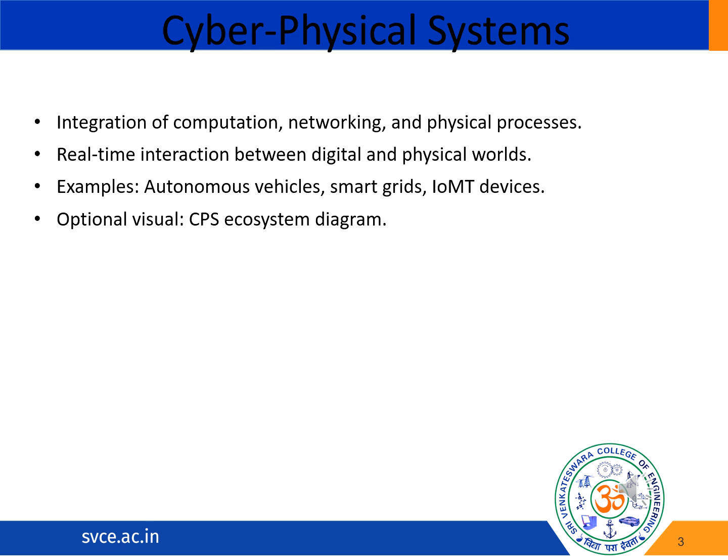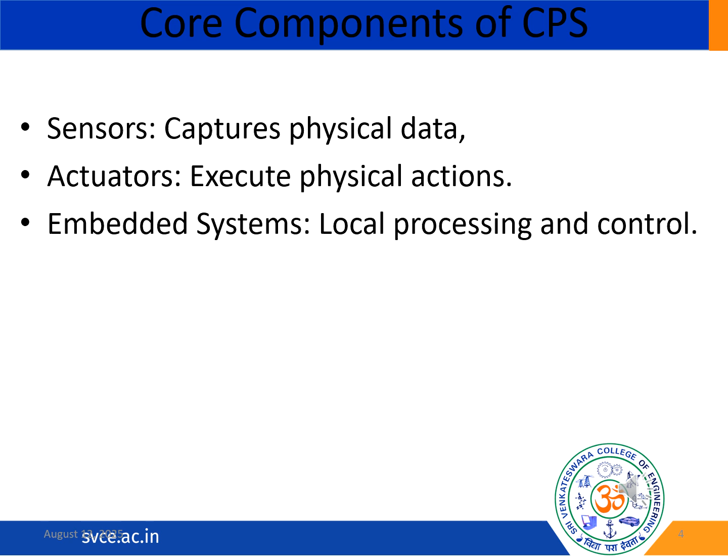Moving on, we have the core components of CPS systems, which we have already seen. The key components are sensors, actuators, and embedded systems. We have local processing and control, and control can be considered in embedded systems. So here we are going to see what is meant by a control system. A control system is a system in which the behavior of the system is determined by a differential equation. Basically, it controls the subsystem or the system of systems, and it manages the devices and systems using control loops.

In control systems, we have various engineering and automation processes, and control systems are now considered an integral part of IIoT. They are responsible for the regulation and behavior of dynamic systems, so we can achieve desired outcomes. A controller has some essential components of control systems, and it plays a critical role in maintaining stability and efficiency. So a control system is nothing but one that controls the subsystem of systems.

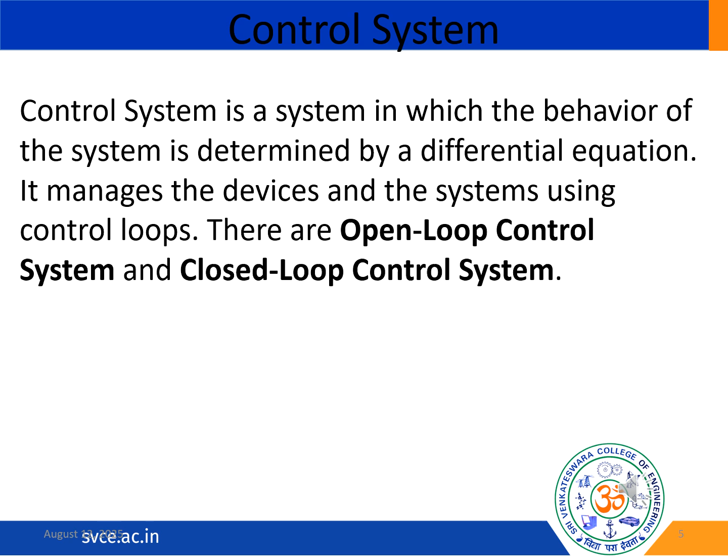Next we are going to see what is meant by an open loop control system. Here we don't have any feedback, and error handling techniques are also not followed. It is very simple compared to the closed loop system, and it is economical, but optimization is not possible in an open loop control system. Overall, maintenance is very easy in open loop control systems.

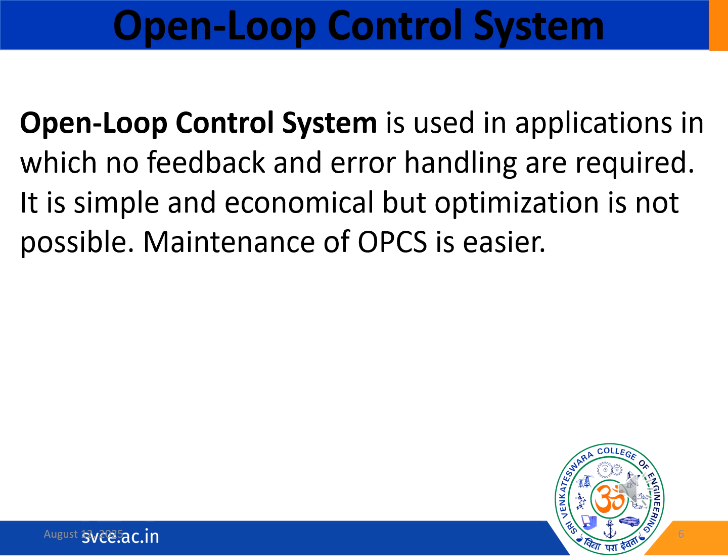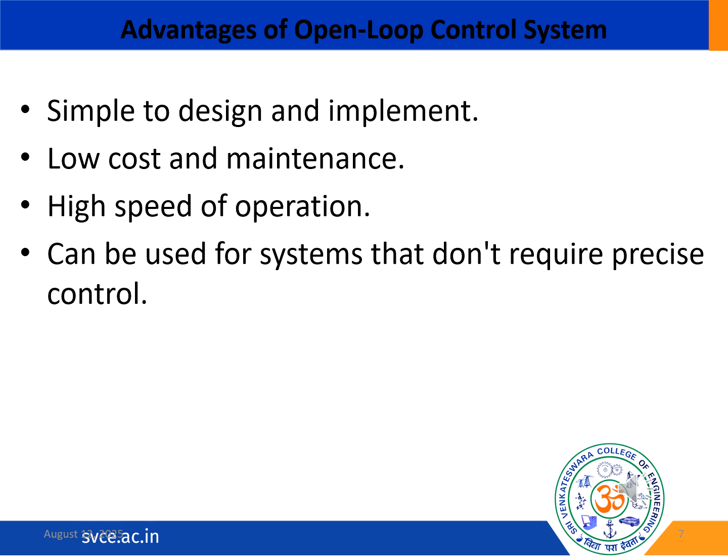Moving on to some advantages of open loop systems. It is very simple to design and implement. There is no need for feedback or any other loop process. It is low cost, and maintenance is very easy. High speed of operation can be achieved, and it can be used for systems that don't require precise control. These are the advantages.

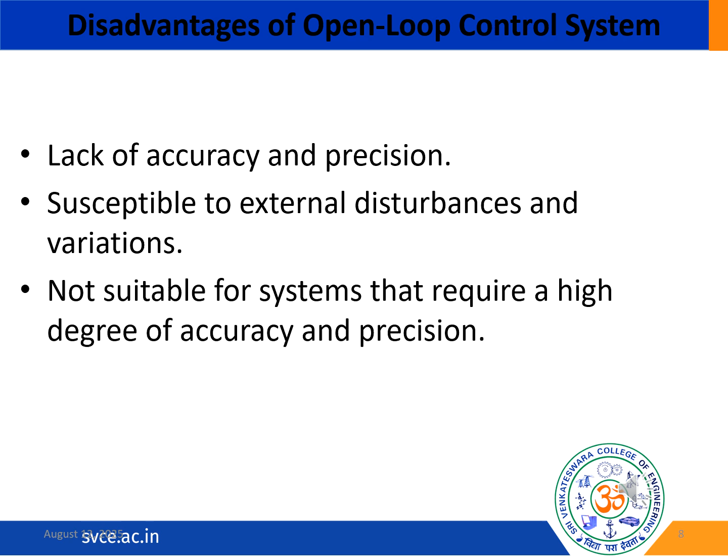Next, the disadvantages of open loop control systems. There is a lack of accuracy and precision. There are external disturbances and other variations, and this system is not suitable for a high degree of accuracy and precision. We have already discussed all these points.

Basically, we have many types of requirements. Any type of input can be provided, so it can work under mechanical engineering, electrical engineering, or any other system based on the requirements.

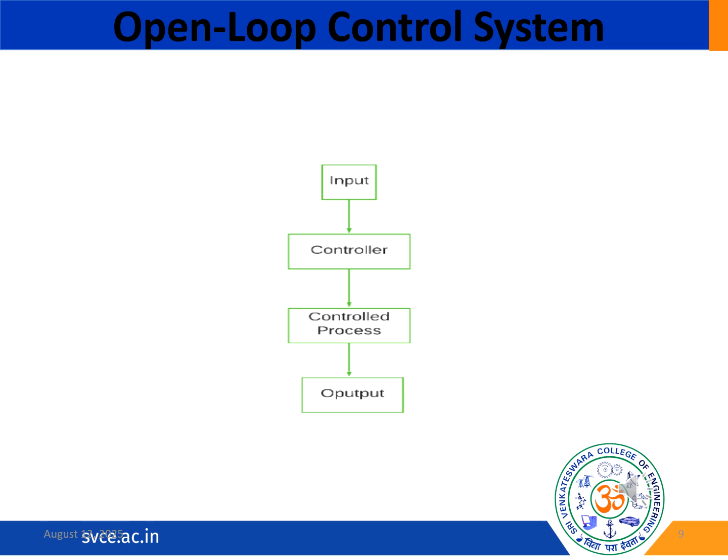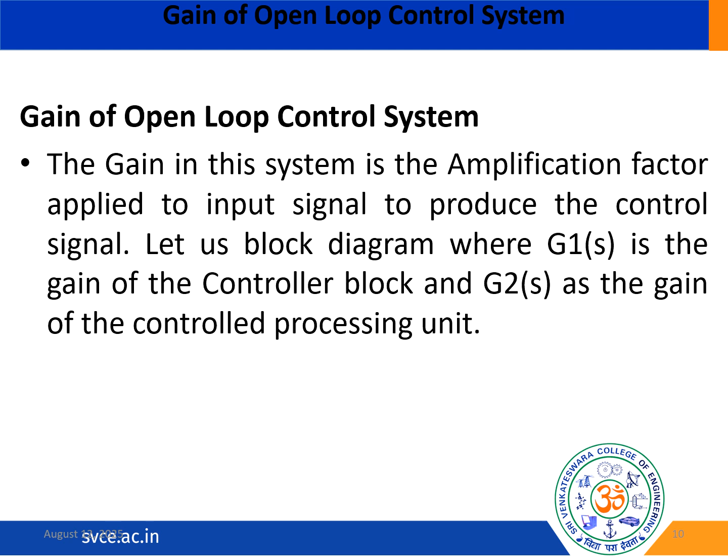We have the controlled processing unit. So let's understand with this block diagram for gain. So first it is the input. We have represented input as Xi of S, and next we have the controller G1 of S, and next we have the controlled process, which is represented as G2 of S, and next we get the output, so we call it X0 of S.

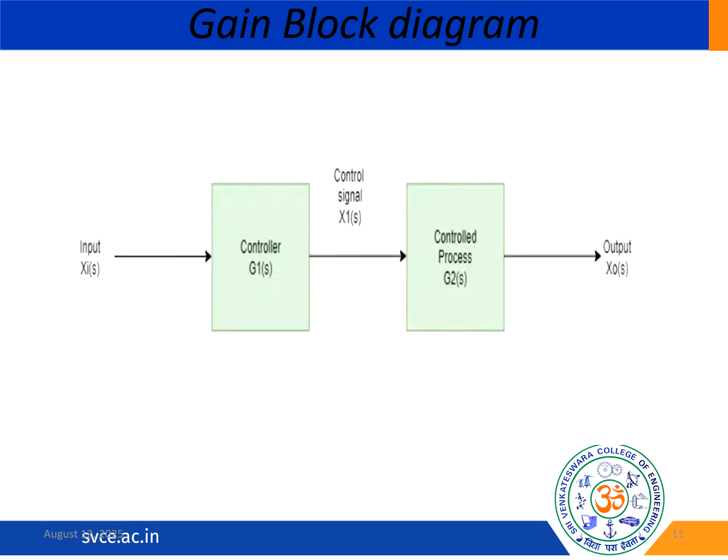So in between the controller and the controlled process, we have the control signal, which is represented as X1 of S. So let's continue with the relationship of the gain of the system. We can consider the magnitude of the input and the output signal. So when you consider this type of system,

gain of the system is represented as G of S, which is equal to output signal divided by input signal. So in the previous diagram, you know what is represented for the output signal. The output signal is represented as X naught of S, and the input signal is represented as Xi of S.

So gain of the system is represented as G of S, which is equal to output signal divided by input signal. So G of S is equal to, straight away we can write the term for output signal, X naught of S divided by input signal, that is Xi of S, where G of S is the gain of the system.

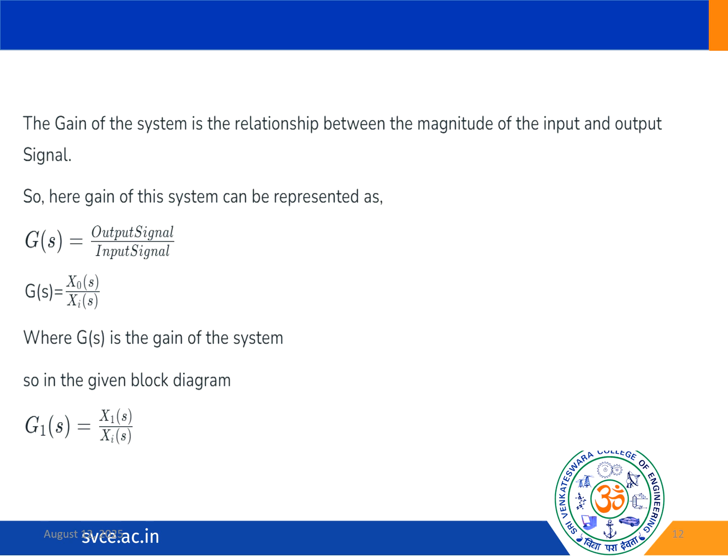So in the given block diagram, we can specify G1 of S as G1 of S is equal to X1 of S divided by Xi of S. Similarly, we can write G2. It can be written as output divided by the input, so X naught of S divided by X1 of S.

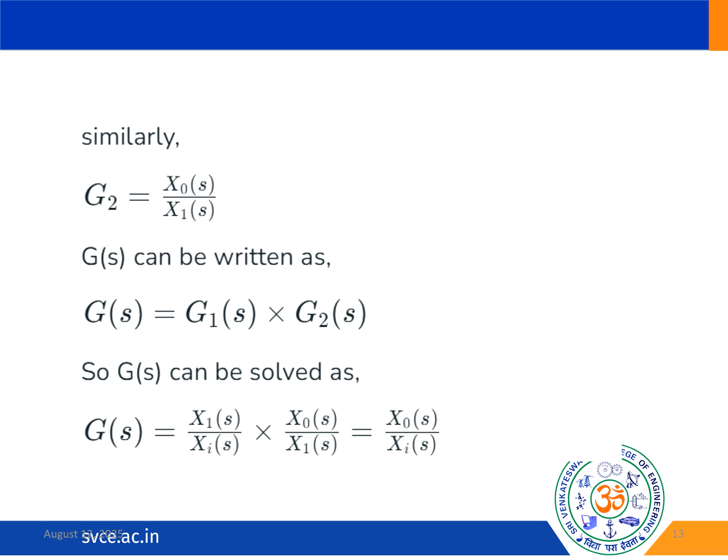So G of S can be written as G of S is equal to G1 of S into G2 of S. So how do you solve this? Substituting the value of G1 of S and G2 of S, the final value is X naught of S divided by Xi of S. So G of S is equal to this last term, X naught of S divided by Xi of S. So we have found out the gain.

So the new block diagram can be drawn in this way. I told you in the previous slide, G of S is denoted as G1 of S into G2 of S. Input is considered as Xi of S and output is considered as X naught of S. So it can be written as G of S is equal to G1 of S into G2 of S.

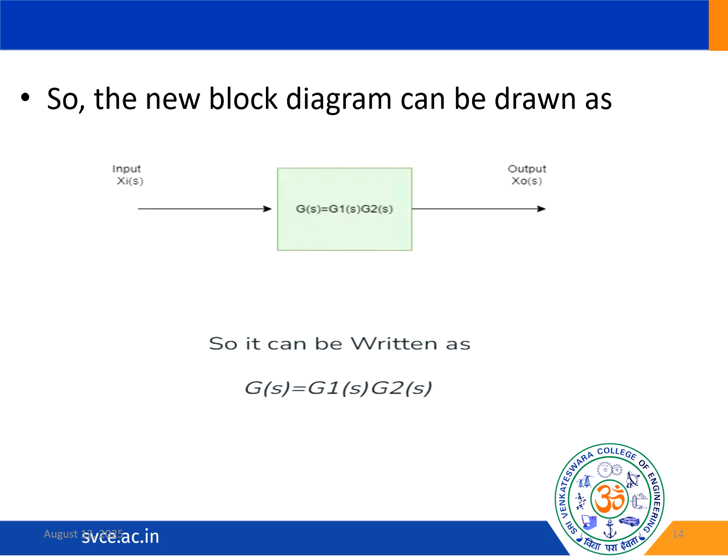So moving on with the working of the open loop control system. First we'll be discussing the working of the open loop control system. Here we have to consider the input signal, make note of the controller, and see what is done in the output device. So if you consider this particular working,

we know the open loop control system works with the process of the signal, and this system is basically used when the output signal is not feedback controlled, and it is also very simple to operate. So first the input signal is converted to an electronic signal through the input device. After detection, the signal passes to the processor for further processing.

So initially the input signal is converted to an electronic signal, and then coming to the controller part. The controller converts the signal to the output signal with accuracy, so that the desired output signal's value should match the input signal's value. This information is sent to the output device. So the input signal is passed through the controller, and then from the controller it is passed to the output device.

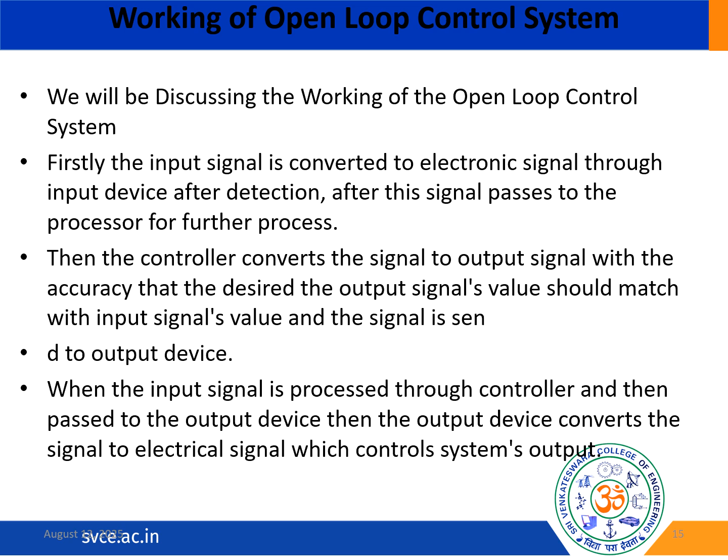The output device converts the signal to an electrical signal, which controls the system's output. So this is the working of the open loop control system. In the next part, we will see some examples of open loop control systems.

So we have some applications with the open loop control system. So first thing is electric fan. So if you consider electric fan, the regulation of fan speed using a regulator is a classic example. So here we have an open loop control system. So this is an example for an open loop control system.

So here the input is the electrical power. So whenever you switch on the fan, you give an electric power, right? So controller is centrally located shaft that rotates, and the output is the fan's rotation speed. So this is an example for an open loop control system.

So moving on to the second example, we have oven temperature control. So how do you operate ovens? So you know the operation, right? So that also comes under open loop control system. So many ovens operate based on open loop control system. So in this case, we can set the desired temperature. So the oven heats up the food inside, and with that temperature, without continuously monitoring the actual temperature, we can manage the overall functions of the oven.

So next we have washing machine cycle selection. So when we choose a washing machine cycle, it is based on the type of clothes. The programs are already predefined in the embedded systems, right? So based on that particular operation, it works. So this is also an example of an open loop control system.

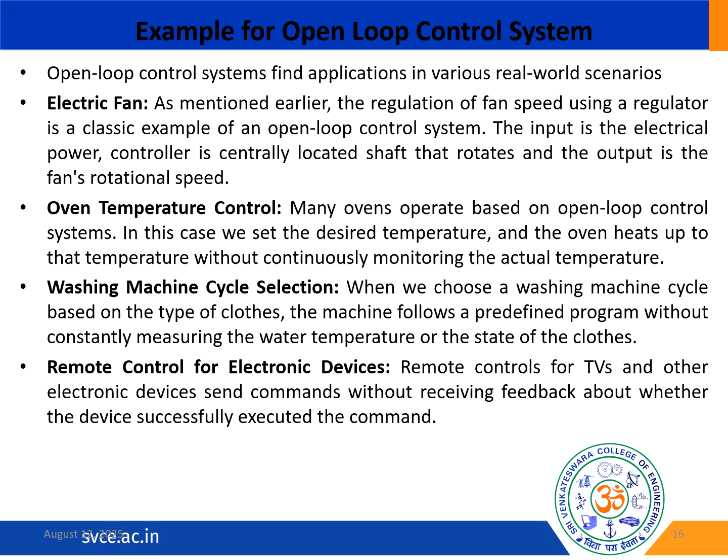So based on the stability, as there is absence of the feedback in the system, the error in the system is not corrected. Okay, so whenever you have a feedback, the errors can be corrected and it can be an evolutionary process. So in this particular case, we don't have any feedback, so errors are not corrected, which leads to reduced stability of the system. So stability of the system is reduced.

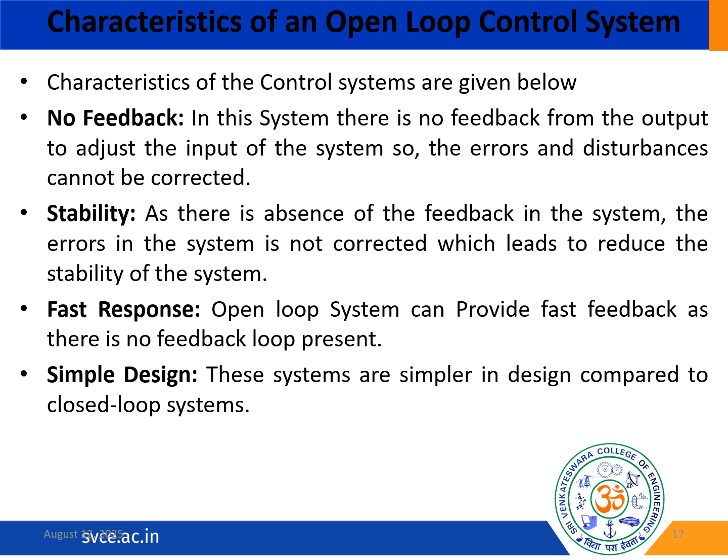So next we have fast response. So open loop systems are much faster than a closed loop system, since there is no feedback loop present. So the design is also very simple. So these systems are very simple in design compared to closed loop system. And moving on to the applications of open loop control system.

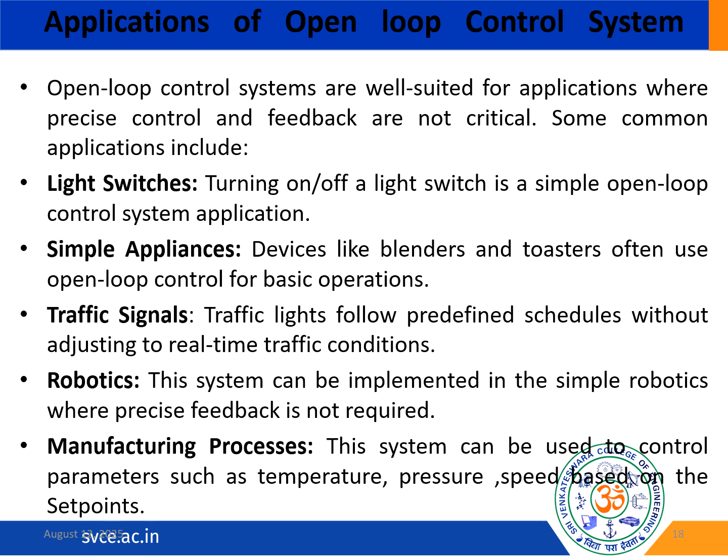So for example, say light switches, you can turn on or off a light with a switch, so we can call that a simple open loop control system. And devices like blenders and toasters often use the basic open loop control system. So these are the basic operations. And traffic signals, robotics, manufacturing processes, everything does not have any feedback. So we can say these are the applications of open loop control system.

So we have an example for open loop drying system. So here it's an application. In the first block we have timer, in the second block we have heating elements, and in the third block we have clothes. So basically an open loop system works with the input and output. So here the desired time is given as the input, and the output is the actual dryness.

So for example, let us consider an electronic clothes dryer. On the basis of the amount of clothes and their wetness, a particular user sets a timer, or it can be called a controller, right? For example, say 30 minutes. So this machine will work for 30 minutes, and it will automatically stop and turn off even if the clothes are still wet or damp, right?

So this shows an example of an open loop system, and it does not monitor the dryness of the clothes, right? So it gives some output signal. The output signal is nothing but the dryness of the clothes, and it does not always monitor the dryness. So this is the block diagram given here.

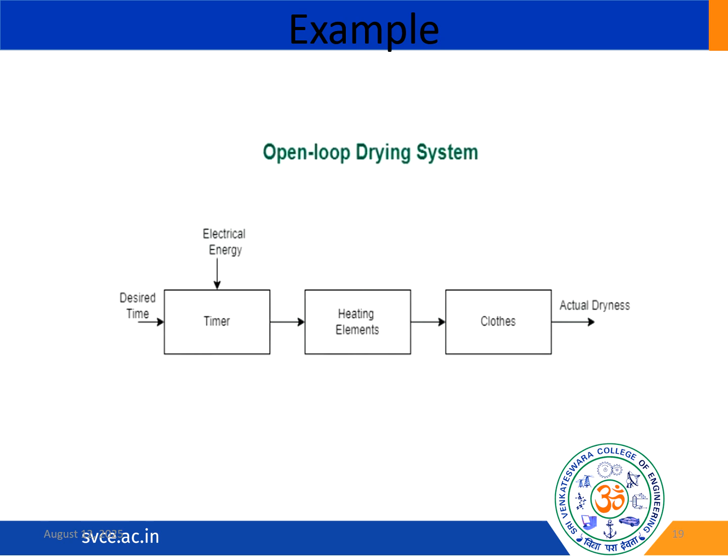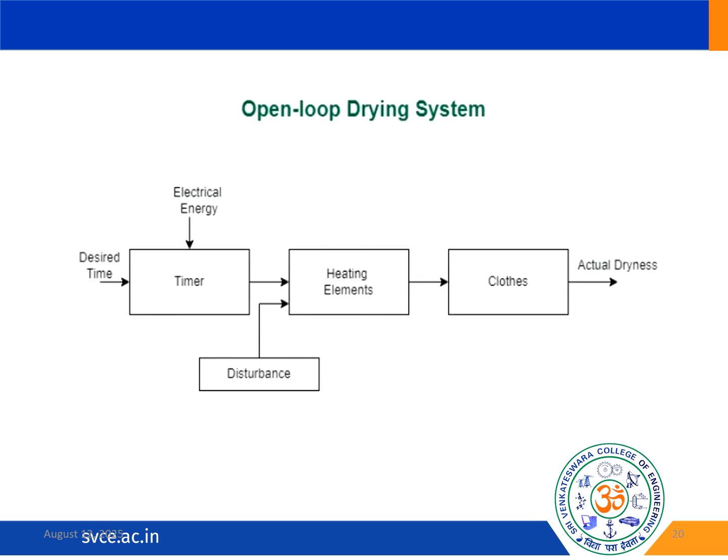So moving on to the closed loop system. It's used in applications where feedback and error handling are required. So always in a closed loop system, we have feedback and error has to be handled. It is a complex system compared to open loop system, and it is not economical, but optimization is possible here. So maintenance of this closed loop control system is very difficult.

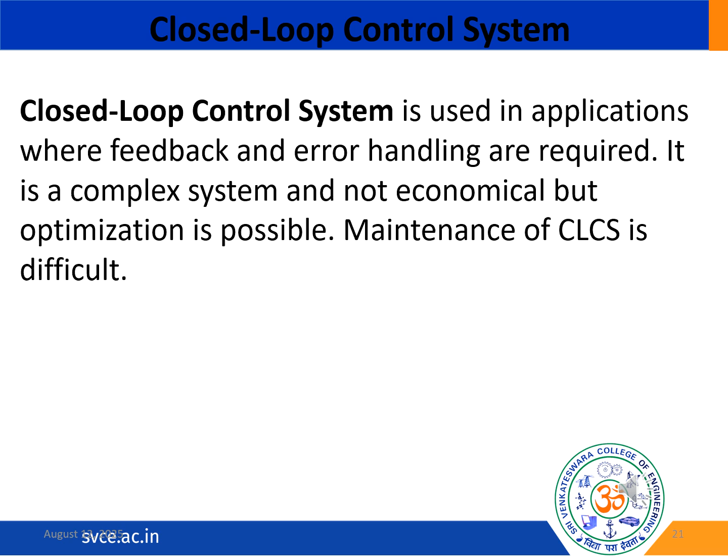And next, moving on to the advantages of closed loop system. In closed loop system, it gives high accuracy and precision. It is robust against external disturbances and variations. So even if there are any external disturbances and variations, based on the feedback and other suitable things, it can rectify the errors, and the accuracy is really high compared to the open loop control system. So this system is suitable for systems that require a high degree of accuracy and precision.

So moving on to the disadvantages of closed loop control system. It is very complex to design and implement.

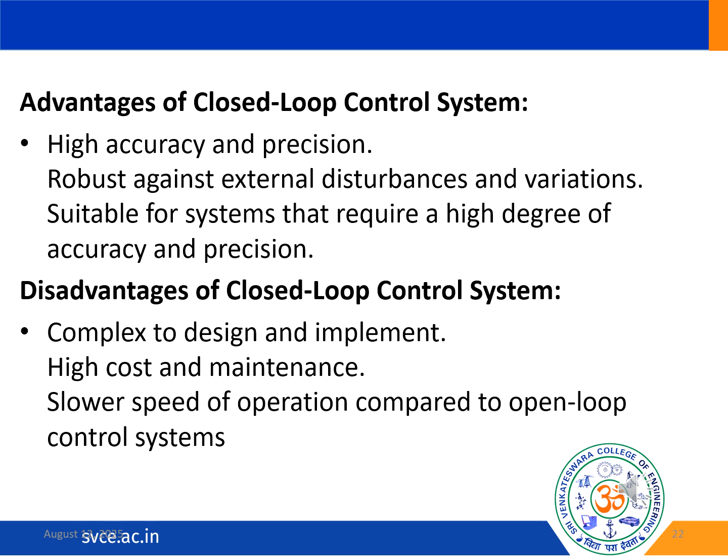So the cost of maintenance is also very high. So when you compare the speed of the operation, the speed of the operation is very slow compared to open loop control systems.

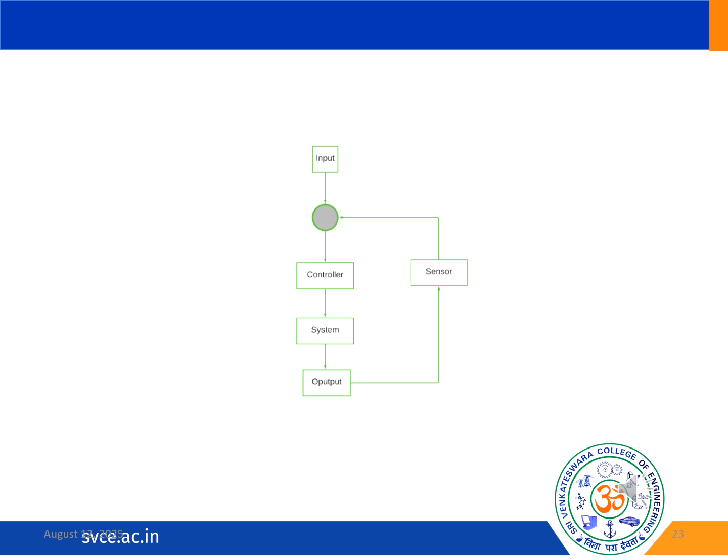So here we have an example. So this is the block diagram of closed loop system. So here we have the input and the controller system output. So basically we have a sensor. So again it is given as feedback. Then the process is repeated from the controller, and again the output is generated, and the process continues till it gives a high accuracy value.

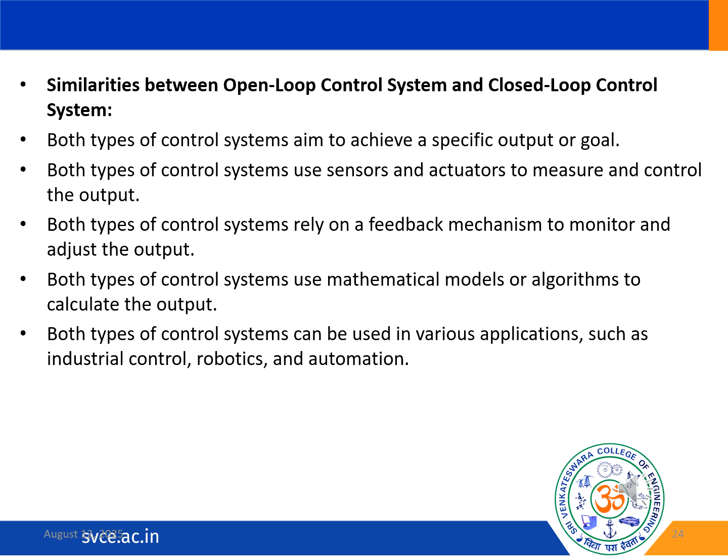So next we have mathematical models. So in both the systems we use mathematical models and algorithms to calculate the output. And the last point is, both the systems can be used in various applications such as industrial control, robotics, automation, etc. So these are some similarities of open loop control system and closed loop control system.

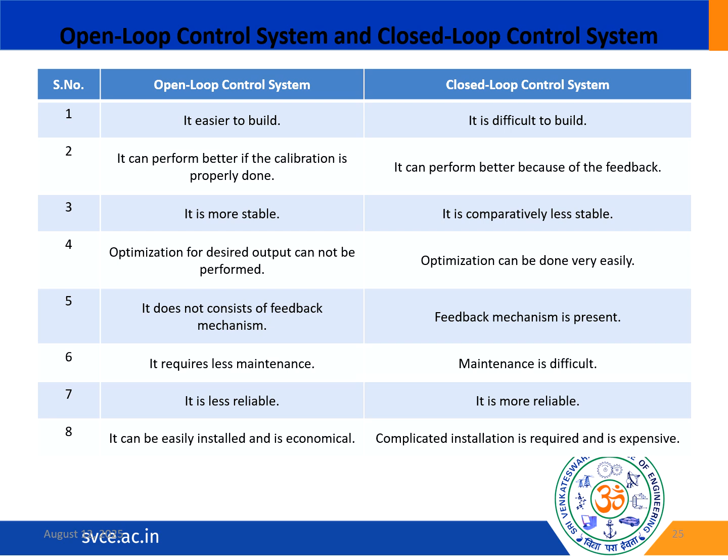So next we'll go to the final part. Till now we have learned about open loop and closed loop control systems. So these are the two main categories in the control system. So I told you what is a control system initially in the first 2, 3 slides. So these control systems are used to manage and regulate the behavior of physical systems. So with both the types of systems, we have so many advantages and disadvantages. So based on some feedback, we'll be using closed loop control system.

So till now we have learned about the various IIoT methodologies. We have seen what is meant by IoT nodes, what are the challenges of IIoT. We have seen so many architectures of IIoT and so on. So almost your unit 1 is over completely.